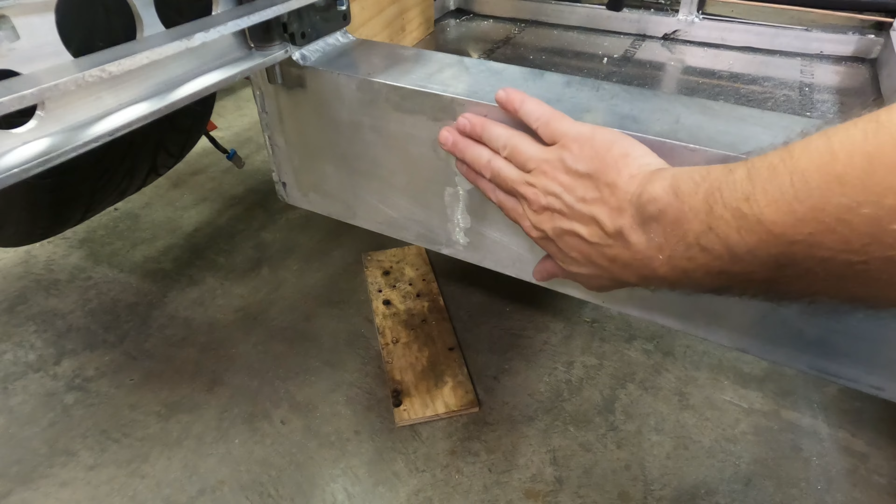Well, I am back. Had a week and a half off from working on the car - had a business trip/vacation to go on, and we're back. We're going to start working on the car again. The first thing we'll do this morning is remove the door hinge.

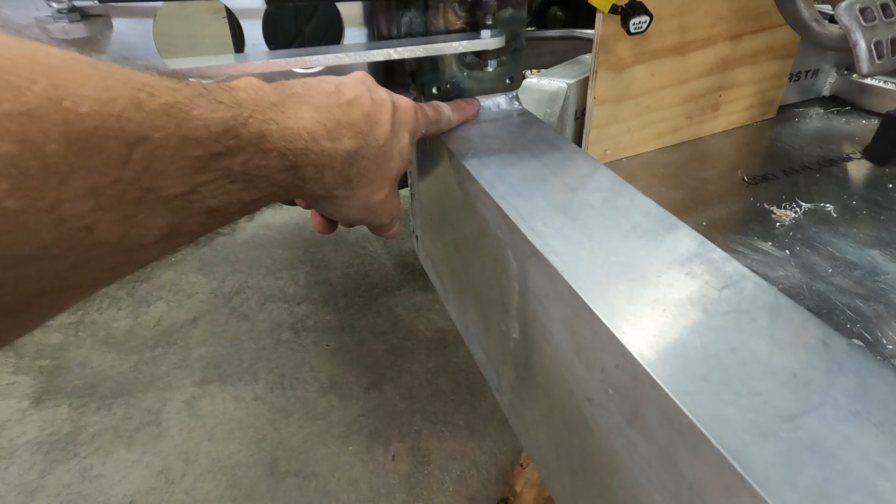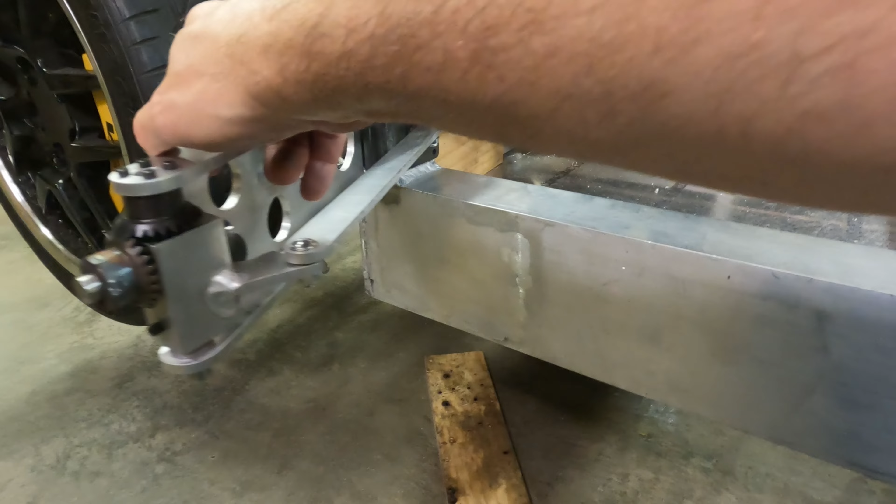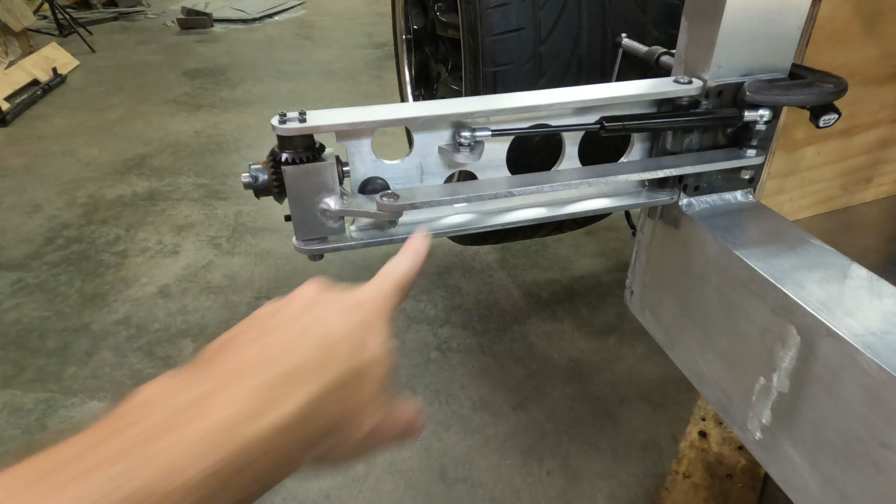I've already started taking the fake door panel off. I'm going to remove the door hinge, and we're going to start grinding these braces away to make room to put the hinge in the correct place. We'll grind those two braces off both sides of the car, get those places ready to mount the hinge, drill the holes in that tube so the hinges bolt in place. I don't have the correct bolts, I'll have to order those, but we can get everything lined up and drill the holes ready for the bolts. Let's get started on that.

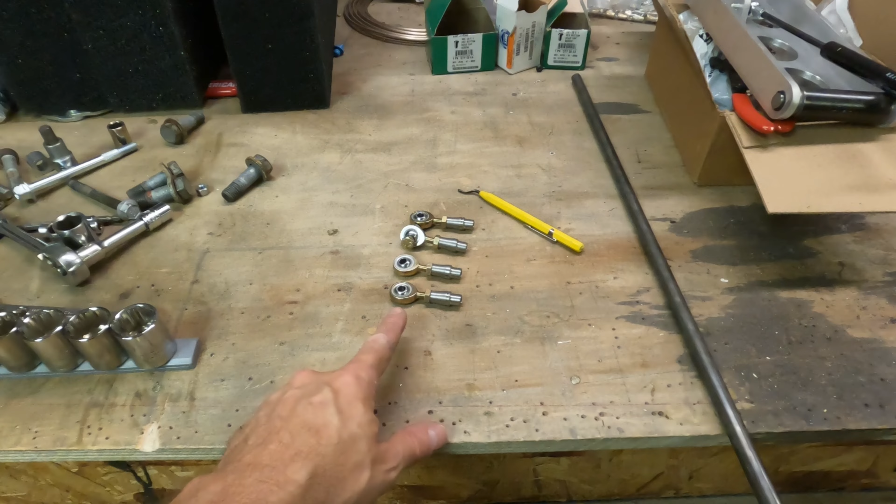It'll look good. I moved the hinge down close to where it goes - I'll have to check my solid files for an exact measurement, but it should be just above this weld bead here, that's where I meant for it to be. The door will close just above the line here, giving room for the carbon fiber tub and carbon fiber door skins - about a half inch gap for all that material. That's close to where it goes. I'll measure and get an exact location, then start drilling holes soon.

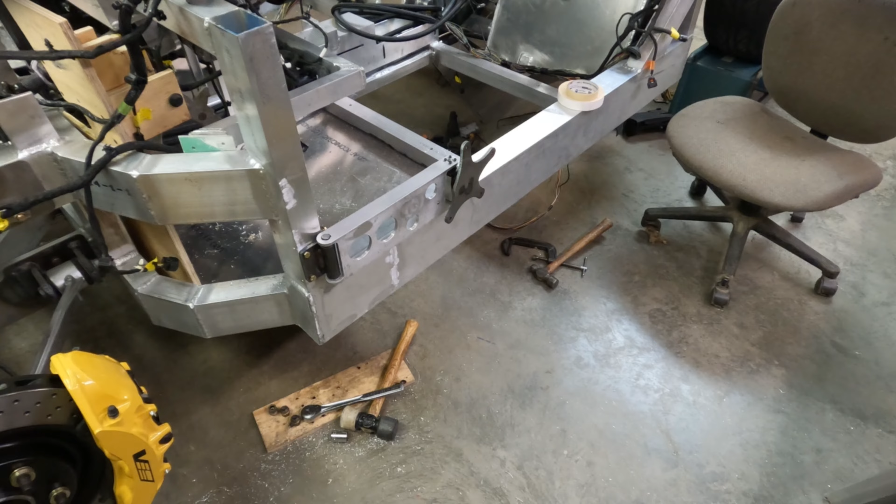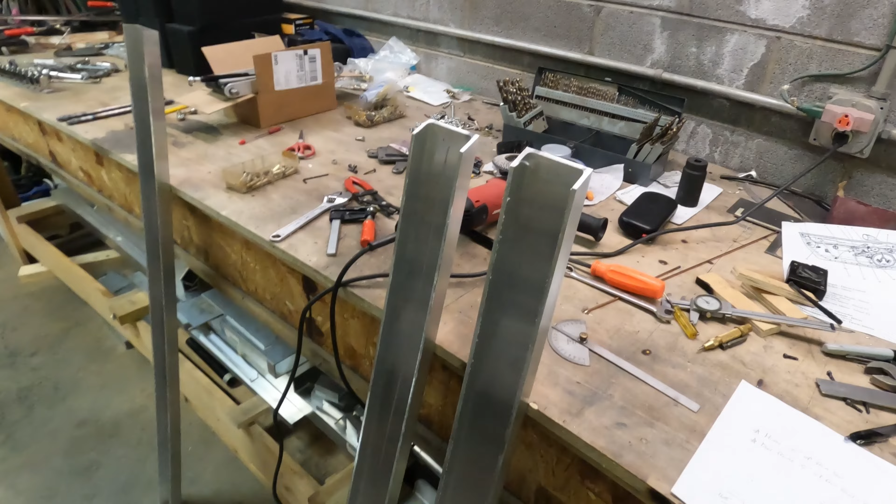Also, in the last video I told you this bar here was supposed to be adjustable, and this was just a temporary bar. While I was on vacation, my parts came in. This is the metal tube I'll cut for that adjustable bar, and these are the four ends - steel pieces that weld to the tube. There's an adjustable rod end with a lock nut, and left and right hand threads, so it's easy to adjust in and out to get the exact location I need.

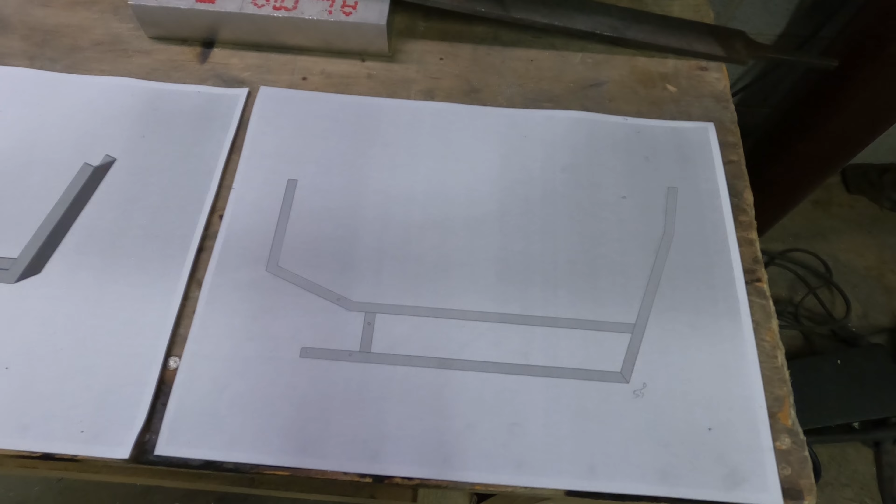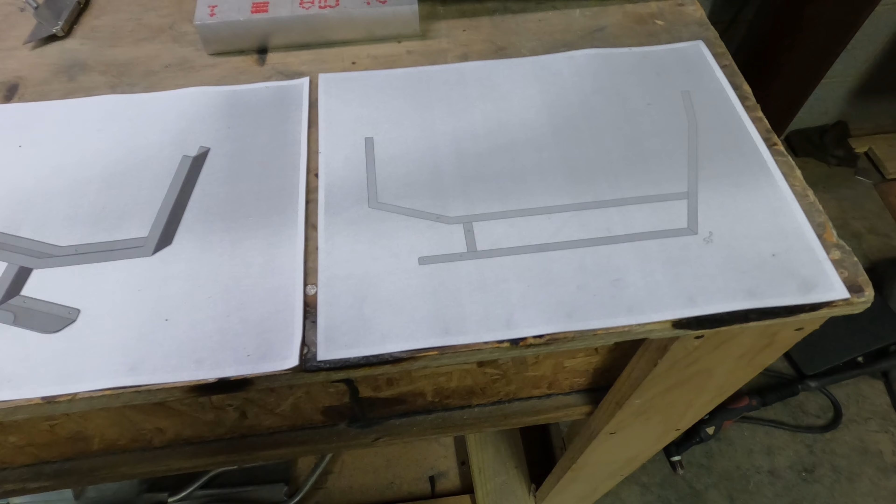I think that's what I'm going to do next - cut this rod to the exact length and weld these ends in, get these pieces made so I have the hinge set up correctly before locating it precisely and drilling the holes to mount it. I also need to weld this on - I had it tack welded in a couple spots, and while prying on the door just before leaving on vacation to check how solid it would be, I popped those welds loose, so I need to weld that back on. I'll get the exact rotation alignment and then weld it permanently. That gives us a few things to do. I'm going to start on these adjustable rods.

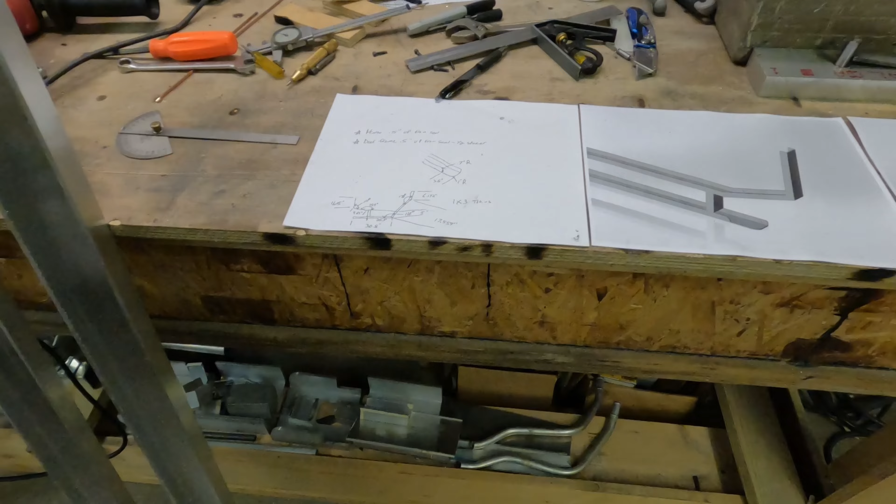Well, I have the hinges drilled and some bolts stuck in the hole part of the way at least. To mount it here, I'll have to order the correct hardware and correct length bolts, then I can fasten this up securely. Once it's secure, I can start taking some measurements off of different things I need.

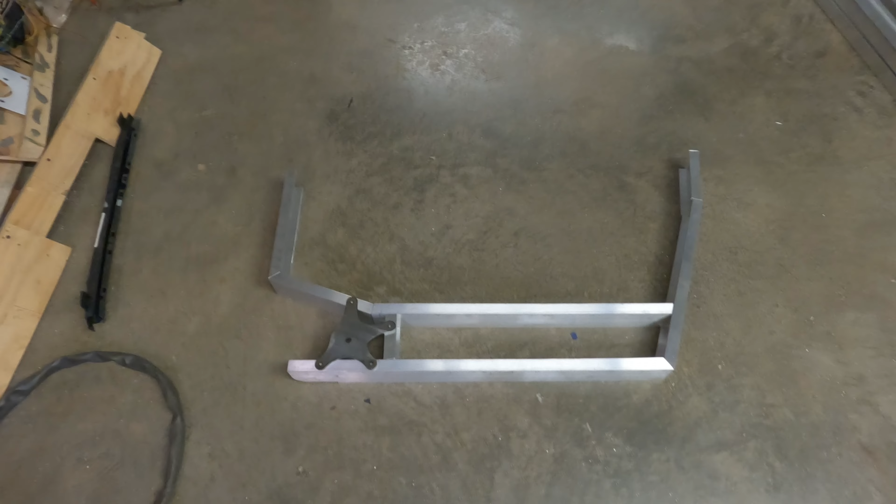Also started cutting some of the door rails. These are cut down to 1x3s, and they will get cut and put together. This is one end, the end where the hinge attaches. You can kind of see the holes, and I've got some pieces cut for clearance. This is roughly the shape of the door, most of it.

The top pieces here may change. They may have to be angled inward just a little, so I'm going to probably leave at least one, if not both, of those off. I can go ahead and weld up all the bottom pieces, and once the hinge is completely mounted to the door secure, I can drill and mount this door using a spacer.

Between the door and the door seal, to make sure everything is aligned correctly. Once the door is finished and mounted, then I can start worrying about the back plate where the lock, the striker plate, and the lock mechanism attaches. Need to order those, though I don't have them yet.

I have some measurements written down here, some angles and dimensions for this door. But I guess I'm going to stop for today. I made some good progress today, and we'll pick back up tomorrow working on this door and try to get the pieces cut and maybe start welding it together.

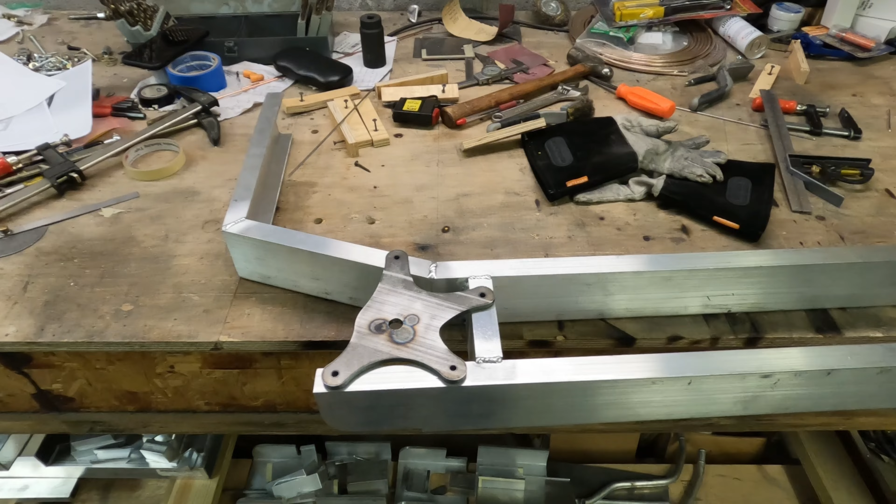Well, I have all of the door pieces cut that I know how to cut right now. There'll be more pieces later, but I've got to purchase the door latch mechanism, the window tracks, the window—I have the windows, but the tracks and all of the parts that accompany the tracks need to work, so I'll know exactly where the windows fit inside this door frame, and I can continue finishing up the frame.

But you can see the pieces here. I have this steel bracket laying here. This is where it will bolt to the door.

Just showing you here the pieces. There will be pieces that span across the top, but I need to see if the glass is closer to the inside of the frame or outside of the frame.

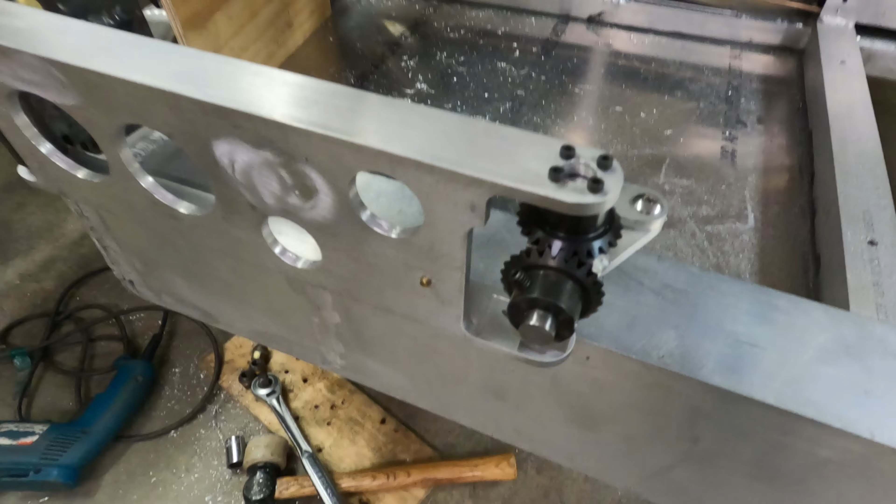Pretty sure it's going to be the inside. Before I put the cross pieces on here, like a bar for crash resistance, I think it'll weld to the outside also, but I want to see how that window interacts with this frame first before I make and weld those pieces in.

But I believe all of these pieces are ready to weld together and make a frame. I need to make a couple of fixtures to hold pieces at the right angles, and we can start tack welding this frame together.

Well, the door frame is welded together. Excuse my messy table, I can barely work on it. It's terrible, but I'll clean it up eventually. This is what the frame looks like.

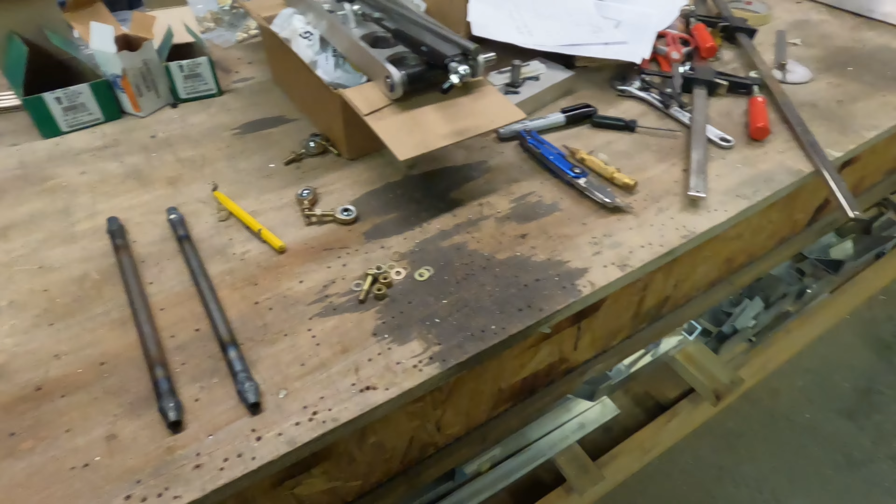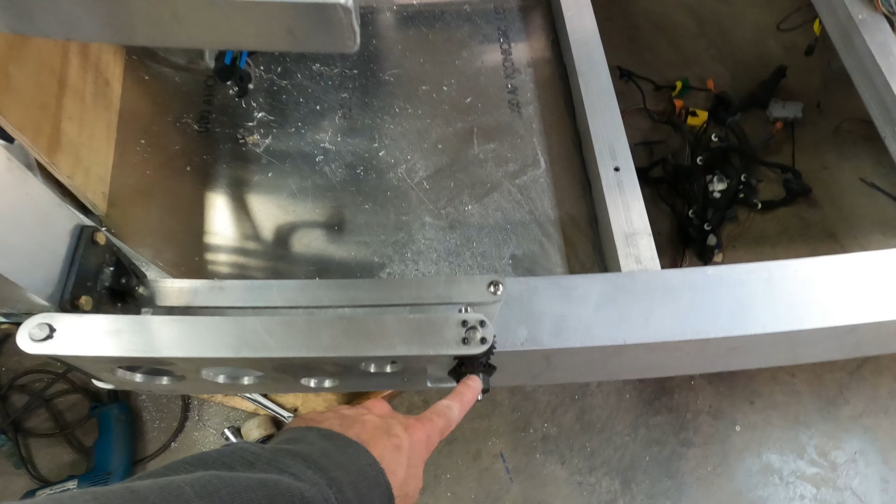And this is the part that attaches to the door hinge, and it'll bolt in these 4 locations here. I have to measure and get the exact location and then drill the holes and transfer those into the aluminum, but that is very close to where it goes. You can see how it attaches in 4 different locations there to make it as solid as possible.

And then that piece will get welded here on the end of this gear and shaft, where I had it spot welded at one time, but it broke off. And I need to go ahead and order some hardware to mount that hinge permanently.

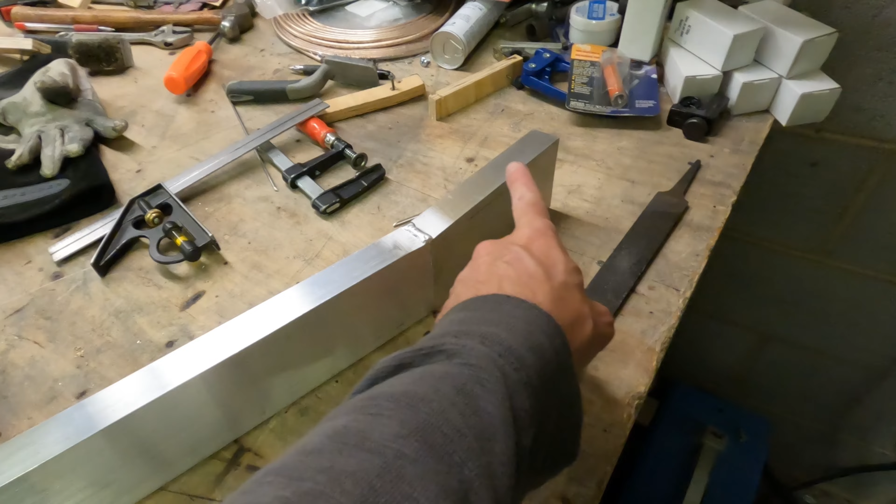And then I need to replace this with the adjustable bar. I welded those 2 rods together here, but my welds were a little hot and penetrated into the threaded insert on the inside, and I'm going to have to put these in a lathe, run a drill bit and a tap back through them to clean up the threads.

I can't get the rod ends to screw in quite far enough, so I will also have to order some taps. They are 1/4-28, both left and right hand threads, and I don't have those, so I'll get those ordered tonight or tomorrow also.

And once I get those adjustable rods, I can mount this hinge up permanently and adjust those rods to get this gear set here at the correct angle. It's off just a hair.

And once this hinge is parallel with this door side, and this gear and shaft here are 90 degrees with the hinge, then all that'll be lined up perfect, and I can start aligning the door to the opening and then weld it to this gear.

But I made a lot of progress. Not sure the door frame is permanent, but pretty sure the lower half is. I may have to cut off some of the top half, or even bring it back here to the weld and adjust the angle, but maybe not. It may be okay as is, but we will see in the near future. I'm happy with the progress we made today, and we'll start on something else new tomorrow.